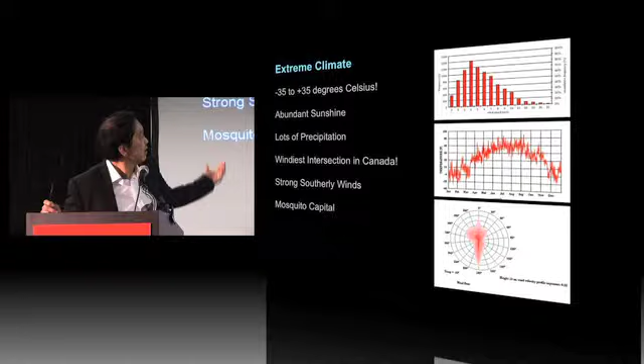This was the question. Keep going. We're going to just hop skip. This was our big team.

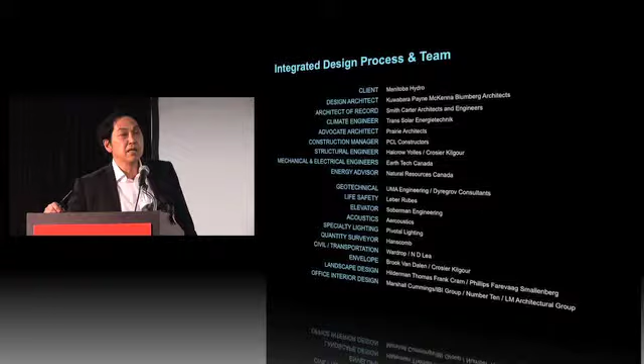There's a great management book, one of the few management books I actually read, called Organizing Genius, by Warren Bennis, an American. I believe it's the way people have to think about problem solving for integrated design.

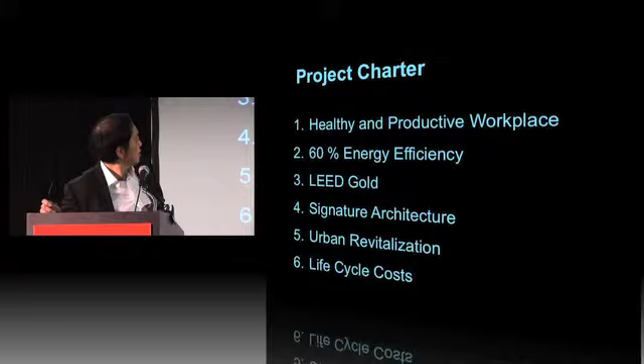These were Manitoba Hydro's spheres of what we should be achieving if you're doing an office building. We said it's not enough. You need architecture, and you certainly need urban integration, because ultimately every building implies a city.

It's what John Portman said. It's about city building, ultimately. It's not about one building on one site.

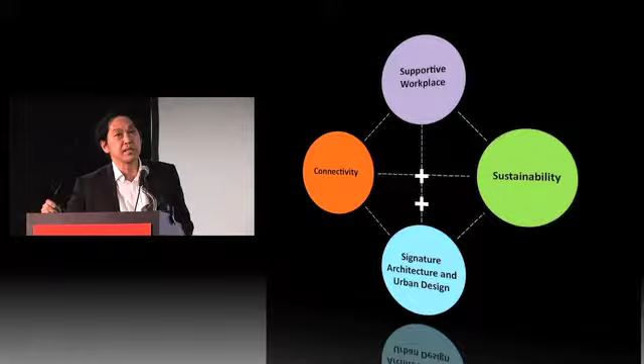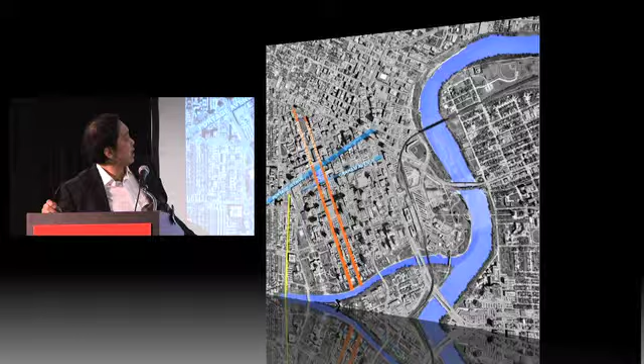We asked this question early. This is Winnipeg with two rivers, the Red and the Assiniboine River, and Portage Avenue, which really wants to be Michigan Avenue.

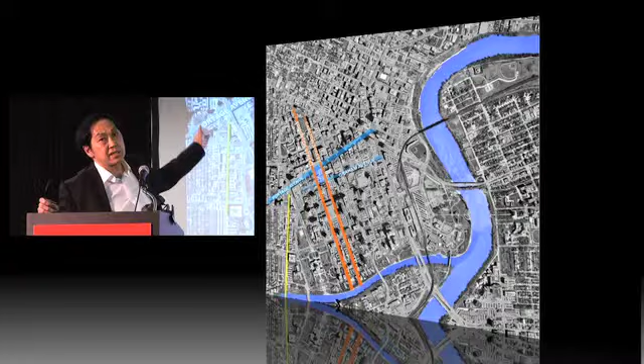It has Portage and Main, and Hydro picked the site dead center because Winnipeg needs a lot of revitalization. They picked it on Portage, and it's also on the Graham Avenue Transit Mall, which becomes a key factor because we're consolidating 2,000 people who are in about 15 locations in the suburbs. When Winnipeg Hydro was taken over by Manitoba Hydro, the mayor of Winnipeg negotiated the idea that they would build their headquarters downtown, and Manitoba Hydro agreed, understanding it would have a huge impact on the economy and culture of downtown.

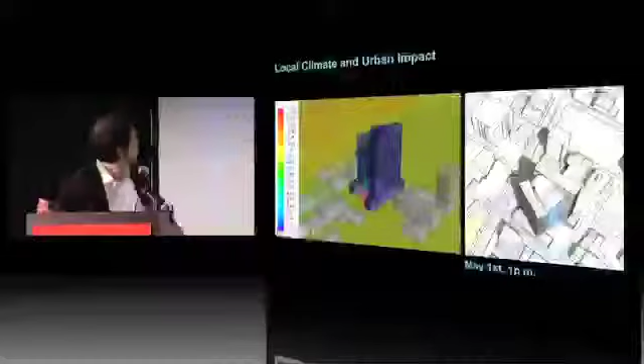These are again Transsolar's. It looks like the Battle of Troy or something, but these are arrows indicating the wind coming from the south, and the formation of the building, which has been described as a capital letter A, and some have described it as an open book, but it sits on a podium, which is 2 and 3 stories.

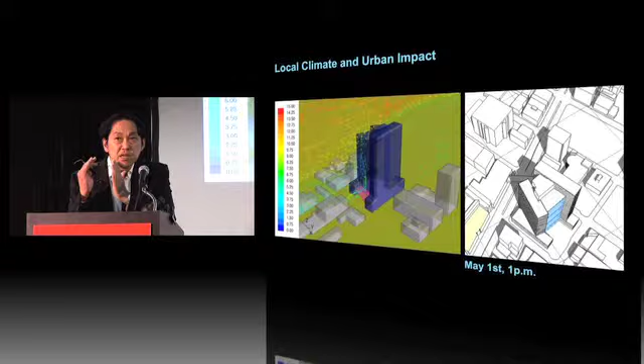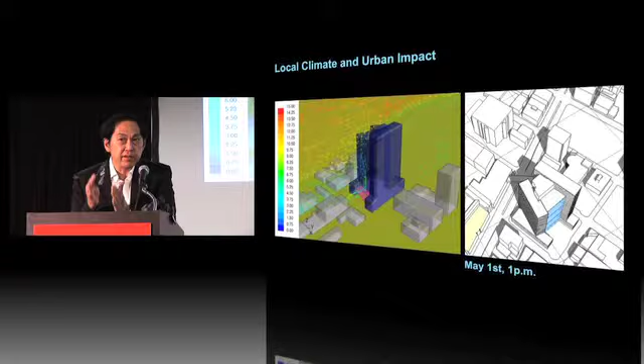It has its narrow edge on Portage Avenue. It's almost like a Flatiron building. Within the capital letter A, there's a west loft and an east loft, and down the middle are all of the things that make this building healthy and sustainable and drive the ventilation system.

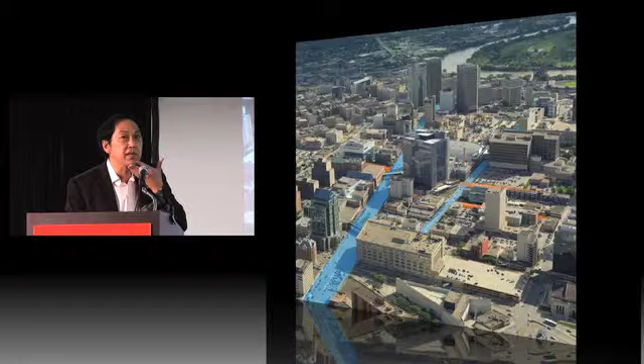This is it. You see the river, Portage, Graham, Transit Mall. 95% of all the buses come through transit, and now 50% of the Hydro employees coming downtown are taking the bus. They're saying they've never read as much in their lives.

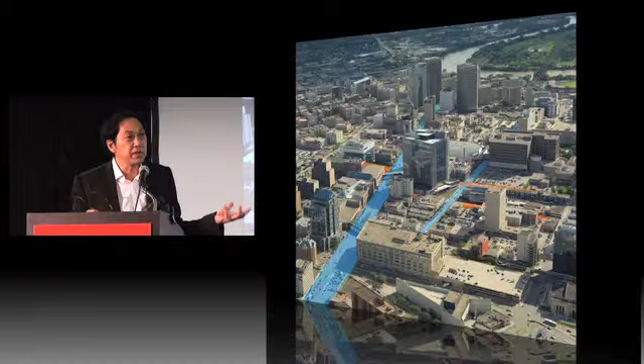We provided very little parking because one thing Winnipeg has is lots of parking. We did not put in a staff cafeteria, which really angered a lot of people, but what it did is affect the economy of 45 restaurants within 4 minutes walking distance.

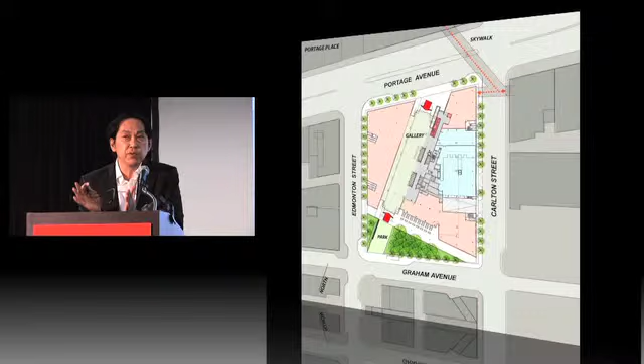The building actually splays and opens to the south because Winnipeg gets more sunlight than any major Canadian city. That's what Transsolar identified, and they said we have to harness that energy. So what we did is we splayed the building.

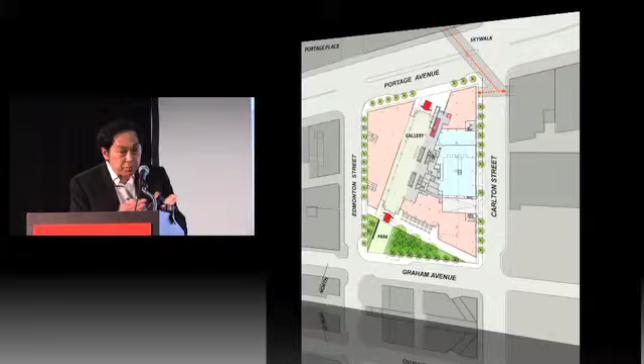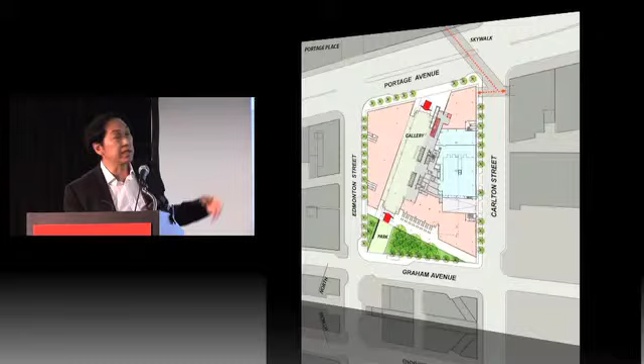The west wing becomes very public on the ground floor, linking the transit mall inside, with very little retail on it. We did not want to draw the city into the building, so all the retail is facing outboard. And we made a triangular park, which is great because it invites other users to participate in this site.

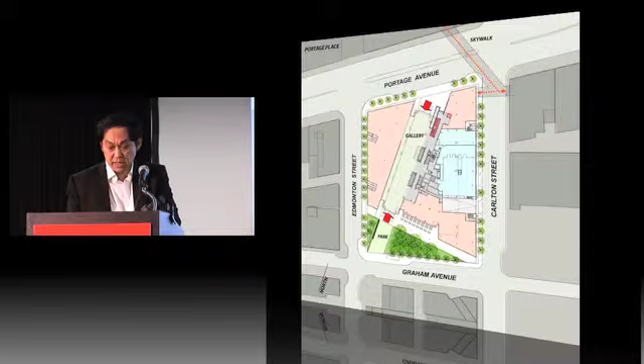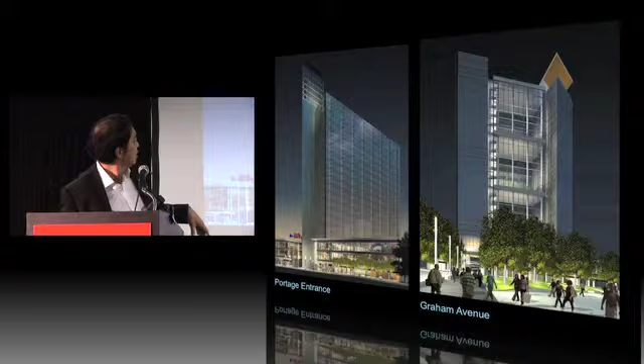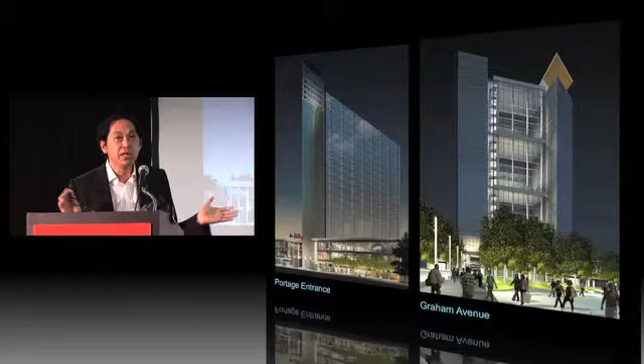Two renderings showing the open end of the A with three stacked atriums related to an idea about a vertical campus at six floors above a base. The Portage Avenue facade is very much like a flat iron building - it noses onto the street and has very little shadow impact. That's another reason we picked it. The podium really deals with a lot of the microclimate of wind.

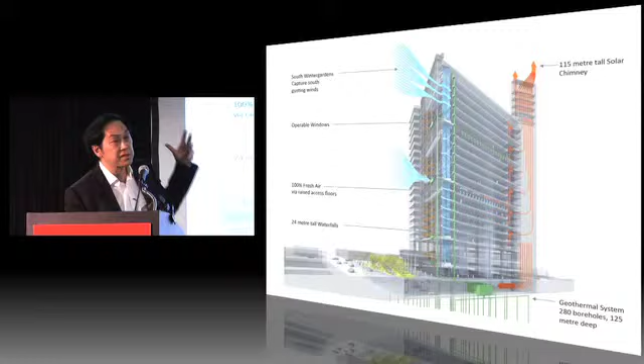A great diagram that we finally got to really understand what we're doing. We have decoupled heating and cooling from ventilation. It's a concrete high-rise building. We have the largest geothermal application in the country - 280 holes drilled to 400 feet depth at 15-foot centers under an urban site. There are 1-inch diameter pipes in tubes in the concrete, 10-inch concrete slabs.

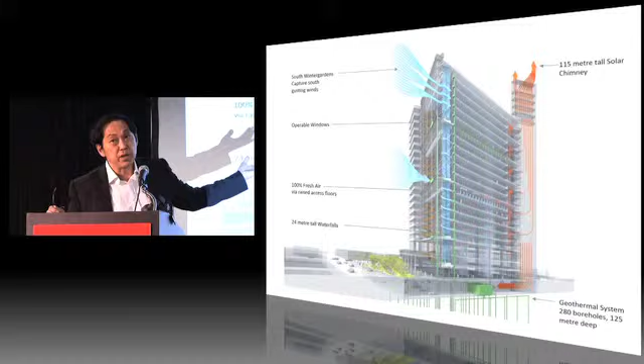The slabs are kept at 20 degrees Celsius year-round, no matter whether it's -30 or +30. We have 100% fresh air coming in because of the south prevailing winds into those atriums. It stratifies, we have rises. We have 100% raised floor, so it's displacement ventilation. And we have a very high performance building envelope, with windows that open. We have basically buffer walls on the west face and the east face, and everywhere else it's primarily triple glazed. Then you see the solar chimney, which drives the ventilation system.

So air comes into the atriums, sometimes preheated if it's -20. It goes into the raised floors, stratifies, hits bodies, warms up, and is drawn across the building to the solar chimney. We have a passive preheat function in the top of the chimney, which is basically a whole grouping of hollow section steel tubes with sand in them - that's passive preheating, and they're painted black.

And it becomes the icon. So when people were talking about spires and heights, ours really drives the environmental systems of the building besides being the tallest part of the building.

Here's our performance - that building, we were shooting for a 60% reduction in energy consumption from the Model National Energy Code building standard, and we're actually overachieving the target. We're achieving it in a way that will drive our energy usage down below 90 kilowatt hours per square meter per year, when most buildings in Winnipeg and around most of North America are like 500, 600 kilowatt hours per square meter per year. This is really big and really green.

And the way you do it is you go passive.

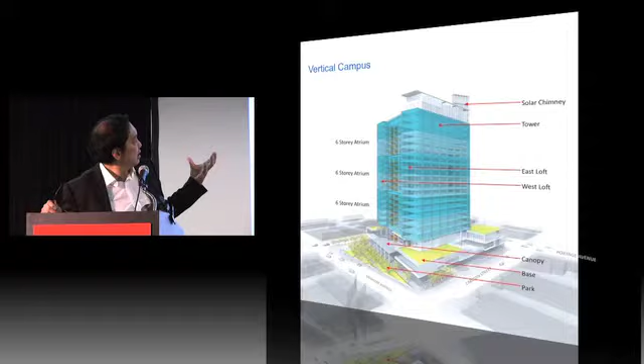So this is the concept of the vertical campus - three prototypical six-story atriums subdivided with north atriums that are three stories and usable year-round, with interconnecting stairs in each of the atriums. The west wing, which is public and open.

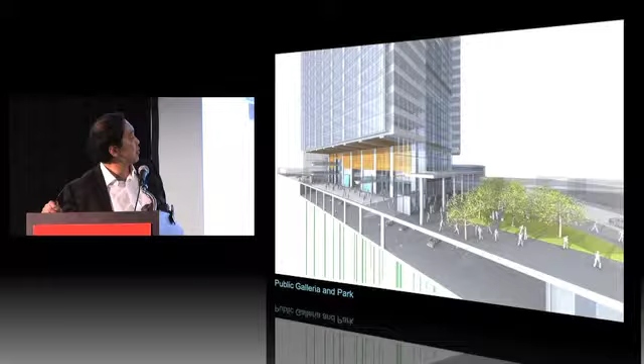Some people have called it the cathedral - a canopy that actually mitigates the south wind as it comes down the face of the atriums, and we protect the park.

The gallery, the green roof, the park.

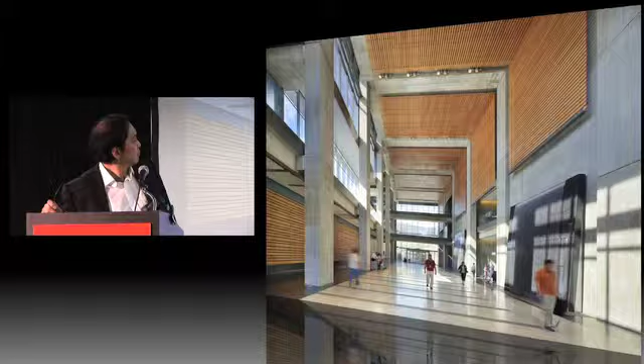We recycled 92% of the material of the buildings that were demolished on site. We sought a LEED gold and we'll get a LEED platinum.

The interconnecting stairs in the north atriums. People gather in the north atriums - they're very, very comfortable, and you look over the green roofs and towards Portage and Main.

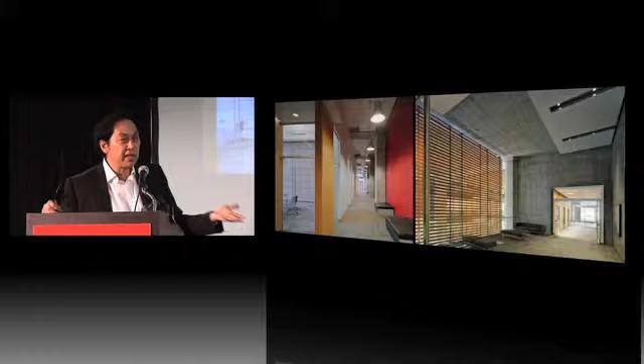It's about teams of people - that's why you make a sustainable building. It's not about energy consumption and all that, it's really about people, because that's the highest cost of any organization. Everybody knows that. And it's the creative talent, the knowledge workers who are coming downtown that make Winnipeg have a chance.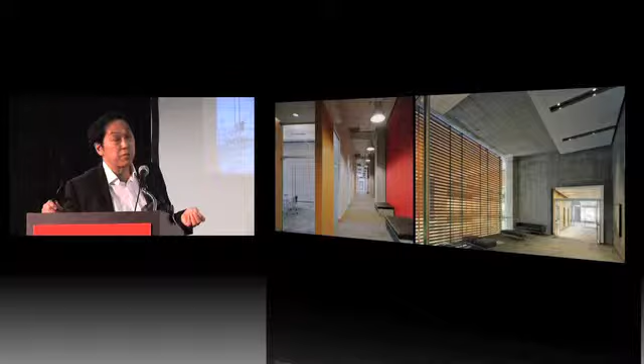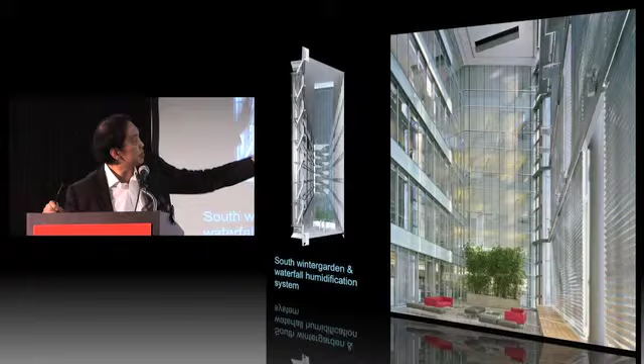The atriums - this is really great. This is our humidification and dehumidification in the south atriums. Unitized curtain wall, double glazed on the outside, single glazed on the inside. These are the lungs of the building - these are winter gardens.

Hope to run this little film next. See if it goes - does it go? No, they're searching.

What they are: six floors, 188 strands of mylar, where the water is coming from the top down, adhering to the mylar into a pool and then being filtered and recycled. The surface area is calculated to humidify the dry winter air as it comes in. We chill that water in the summer and it basically dehumidifies.

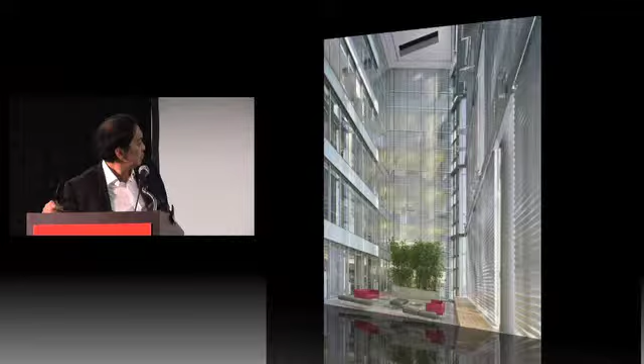There it goes. So this is what I think the future is about - really about the integrated thinking, not only about environmental systems, but things which appear and are very much part of the environment we share.

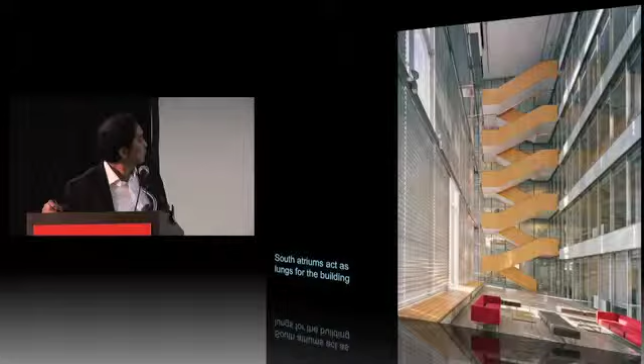There's the pit. We're very excited about that and the passive preheat of the solar chimney - I think those were real innovations within the project. The green roofs and the tower, the windows that open.

Again, the windows that open. It's an event in the city when the windows open.